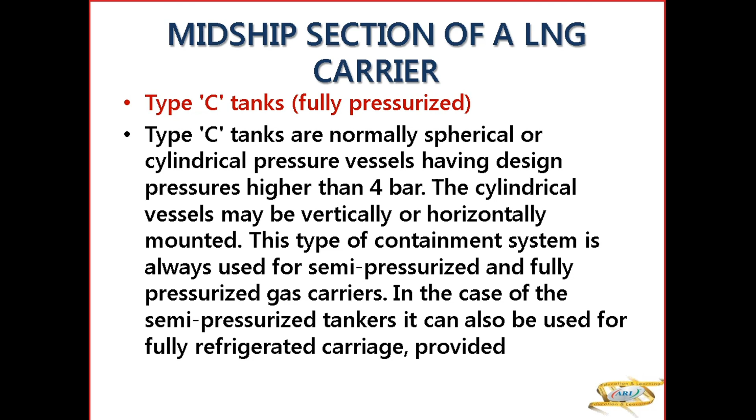So this type of containment system is used for semi-pressurized or fully pressurized gas carriers. It can also be used for fully refrigerated carriage, provided low temperature steels are used for tank construction. And Type C basically are designed and built to conventional pressure vessel codes. Therefore, they'll have better stress analysis.

Now, the design stresses are kept low in these. There is no secondary barrier required in Type C vessel, which was required in other vessels. But here you don't have any secondary barrier. And the hold space can be filled by either IG or dry air. And for fully pressurized tankers, normal air can also be allowed.

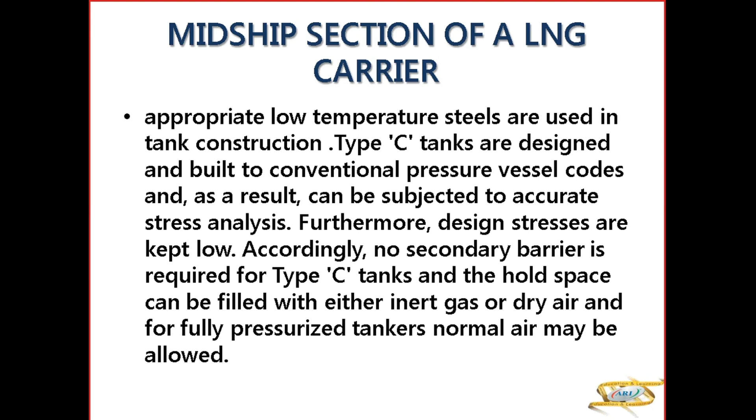So these are your fully pressurized Type C. These are horizontal cylinders that are kept on your cradles. There is no secondary barrier requirement, because they are already at that pressure, and this is ambient temperature.

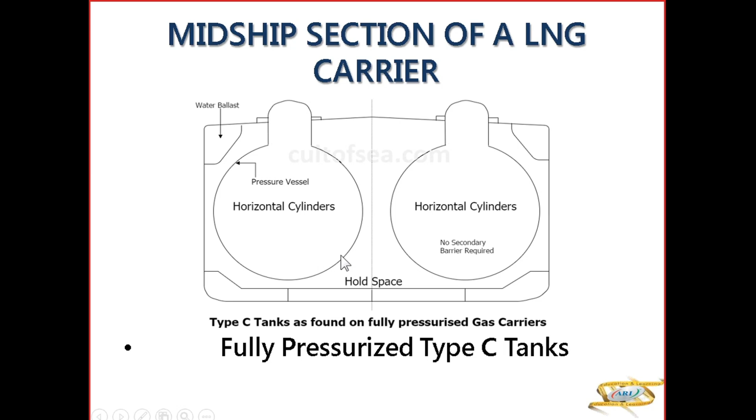The next type of tanks, which are typical for LNG vessels, are membrane tanks. Membrane tanks are very thin membranes, and there are two types. One is the Gaz Transport system, and the other one is the Technigaz system. These two systems are associated with French companies, Gaz Transport and Technigaz, and their concepts are different.

Gaz Transport: the material used here is nickel alloy of 36%, which is known as INVAR. That is typical for Gaz Transport. Nickel alloy of 36% is used for both primary as well as secondary barriers. This alloy has a very low coefficient of thermal expansion. Therefore, you don't require any corrugation. Corrugation is required in Technigaz, which is made of stainless steel.

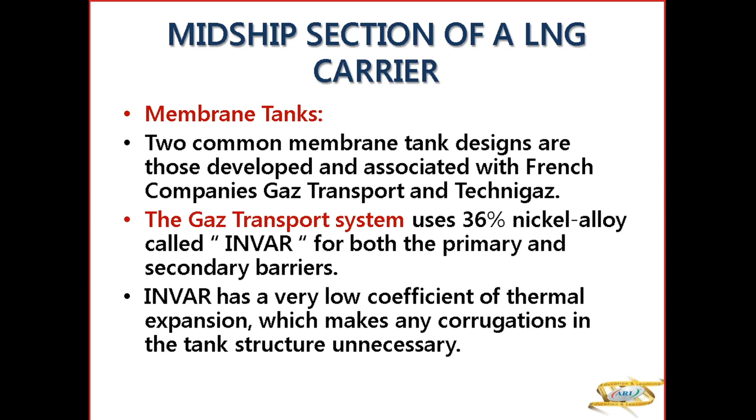Now, this INVAR sheet membrane is very, very thin, 0.5 to 0.7 mm thick. So it is less than 1 mm thick, and therefore it's a very light structure. And the insulation consists of plywood boxes filled with perlite. As I told you, perlite is the material you get in volcanic ash. This is very light and used for insulation.

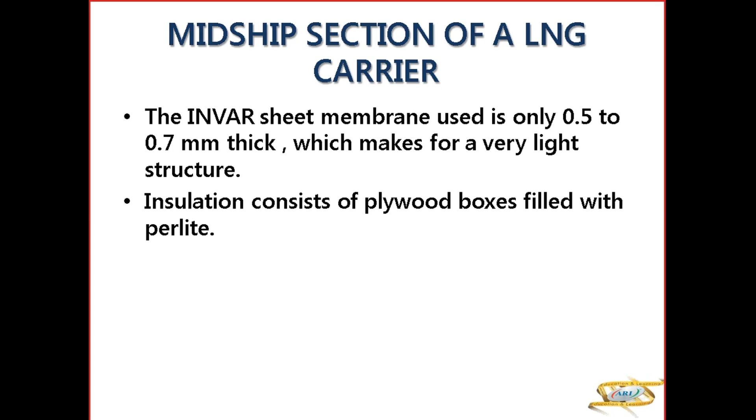Now, this is your LNG type vessel. So these are your membrane tanks. These are non-self-supporting; they are basically part of the hull. They consist of a thin layer membrane supported through insulation by the adjacent hull structure. I'll just show you the other diagram. Here is the diagram.

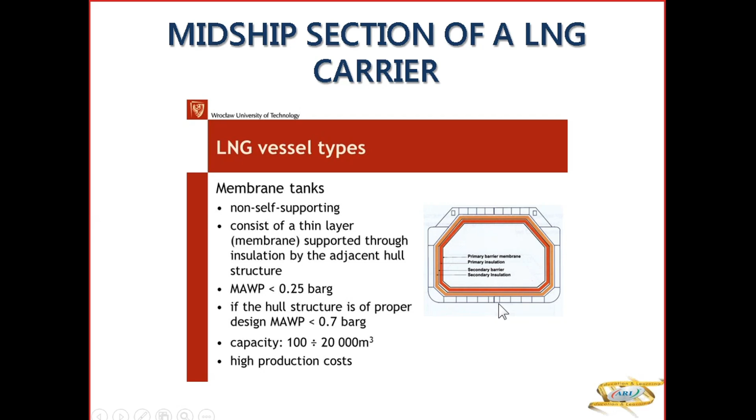Now this is your water ballast tank here. This is the duct keel. Here also the water ballast is there. And here you have a void space or water ballast. You can have either void space or water ballast. Then you have the inter-barrier space between these two barriers.

So the membrane used here is a primary barrier of INVAR, 0.5 to 0.7 mm thick. Then you have the insulation, the plywood boxes filled with perlite. Then again, you have the INVAR membrane, the secondary barrier, again 0.5 to 0.7 mm thick, and then again the insulation, plywood boxes filled with perlite. There are two barriers here. And this membrane is very, very thin, so if it is damaged, it becomes a very costly affair.

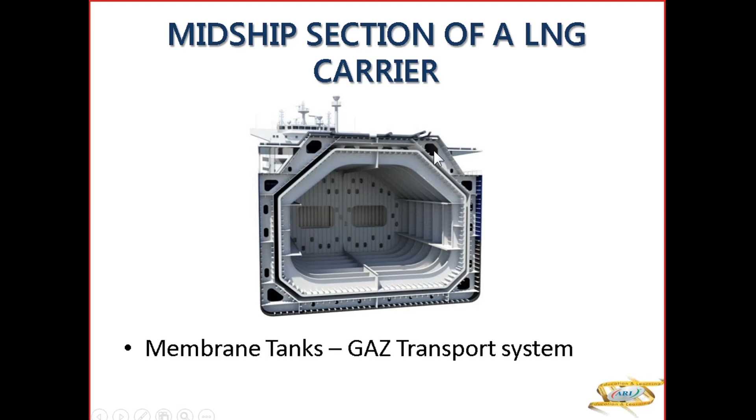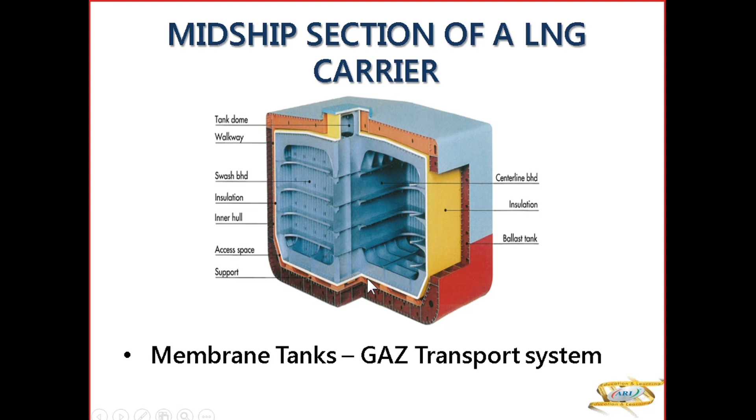If you see this, here you will have either water ballast or void space. Here you have water ballast. Then you have these gap areas. You have the INVAR, followed by insulation, then inter-barrier space, then secondary barrier, and then the insulation. So these are your membrane tanks. You have a walkway here. Swash bulkheads reduce your FSC. These are the supports. Gaz Transport.

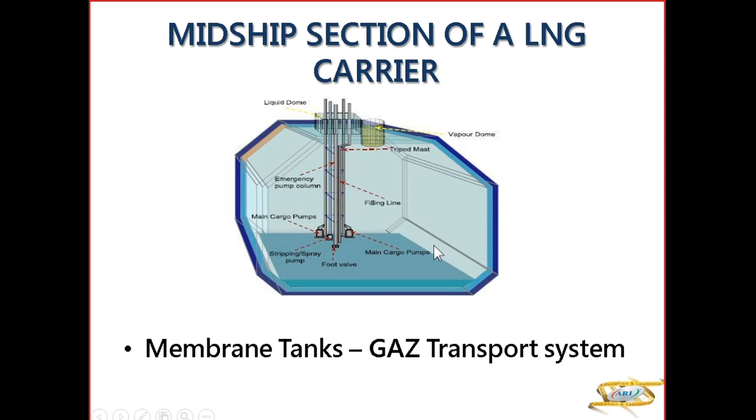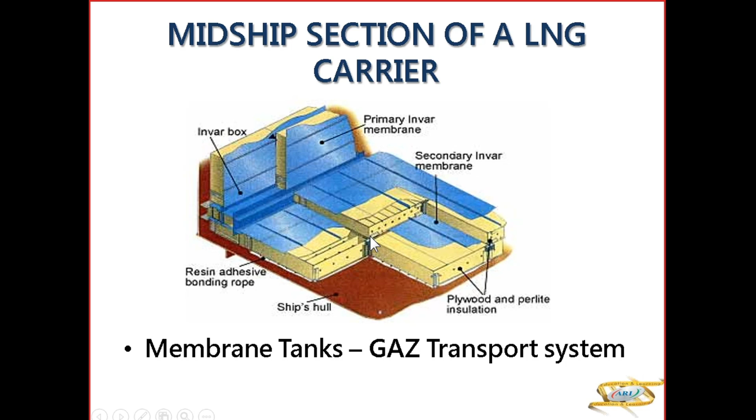That's the foot valve, that's the spray pump. Main cargo pumps are here, and your pipelines are here. The discharge is on top. There's a vapor dome on top. Those are the membrane tanks of Gaz Transport. These are the membranes, then the plywood boxes filled with perlite, then again INVAR, the secondary barrier membrane, 0.7, then a plywood box. This is the type of barriers for Gaz Transport.

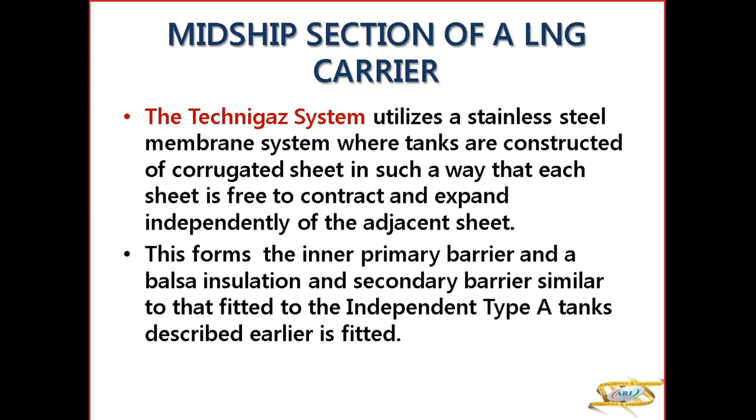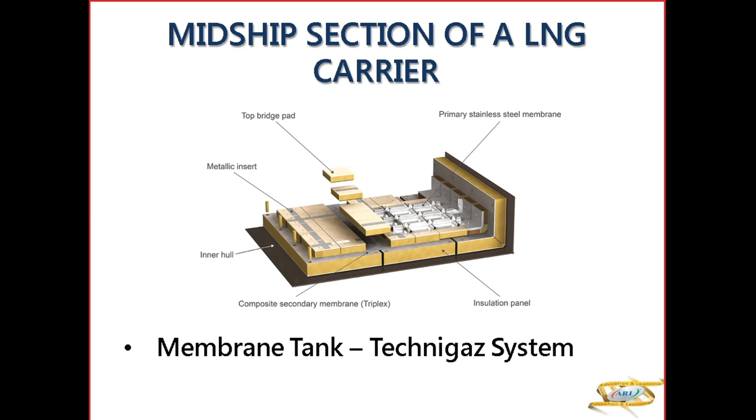Now we come to Technigaz. Technigaz is not made of any alloy. It is a stainless steel membrane system, and it is corrugated, unlike Gaz Transport, which was non-corrugated, because these sheets are subject to contraction and expansion, so they are corrugated and free to contract and expand independent of the adjacent sheet. You have an inner primary barrier, then balsa insulation. Balsa is a light wood that gives insulation. And the secondary barrier, like your independent type A, where you had balsa wood again. So this is your membrane tank of Technigaz, all corrugated inside.

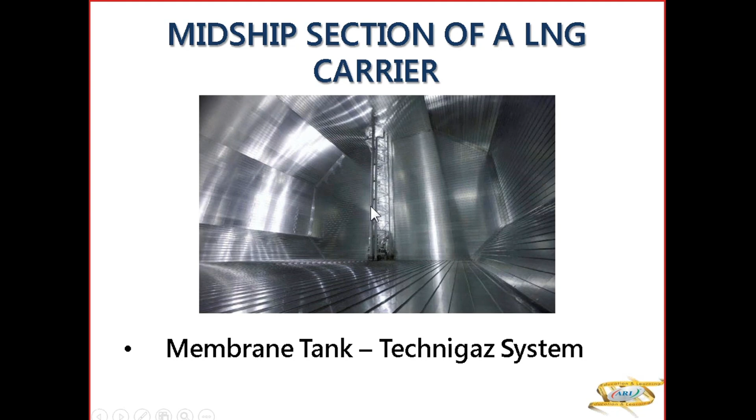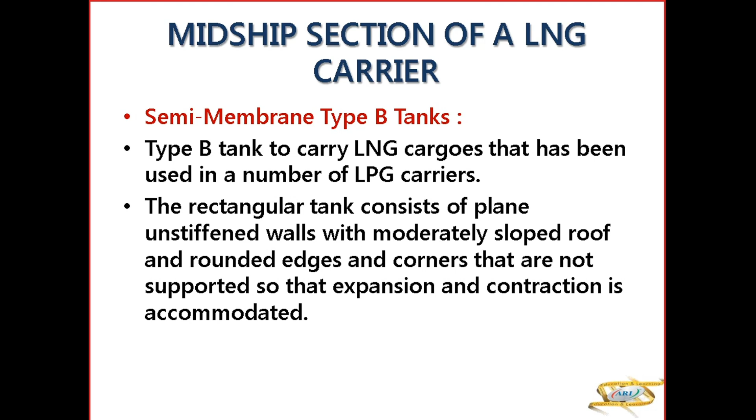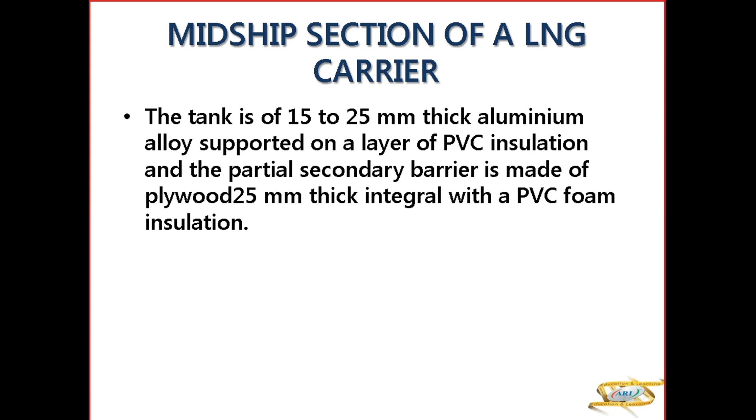Then you might have semi-membranes, which we normally don't use nowadays. Semi-membrane is a type B tank carrying LNG cargo, used in LPG carriers also. A rectangular tank of plain unstiffened walls with moderately sloped and rounded edges, and corners that are not supported so that expansion and contraction is accommodated. The tank is 15 to 25 mm aluminum alloy. Here you have PVC insulation and a secondary barrier made of plywood 25 mm thick with PVC foam. These days the semi-membrane type is obsolete, so you don't have to study it as such.

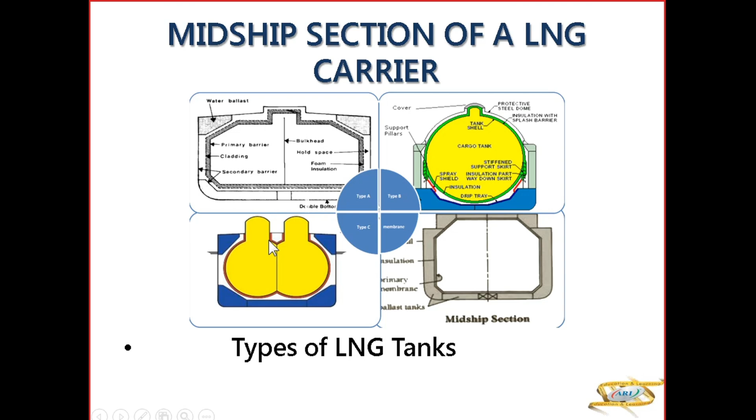So to recall: you have type A, type B, Kvaerner Moss, type C, which can be separate ones or can be merged. Then you have